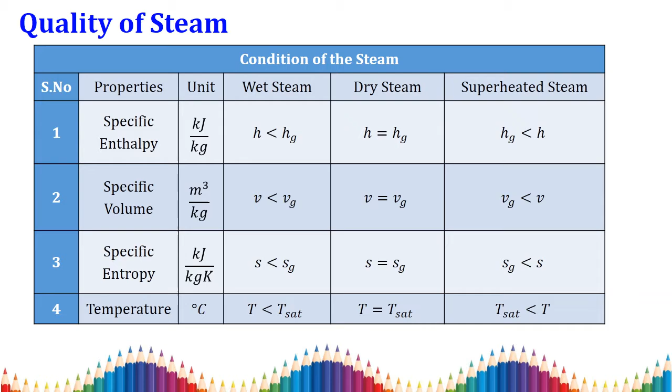Based on the qualities wet steam, dry steam, and superheated steam, we should know some basic properties and how to use the formulas for these properties. The first one is specific enthalpy, with unit kilojoule per kilogram.

If the steam is wet, that is, the given specific enthalpy is lesser than the saturated specific enthalpy, then H equals HF plus X into HFG, where HF is the specific enthalpy at liquid stage. This gives the combination of both liquid and gaseous vapor, and X is the dryness fraction.

What is meant by dryness fraction? It is the mass of vapor present in the total amount of the steam, that is, mg divided by mf plus mg. So X equals mg by mf plus mg.

For dry steam, as I already told, X equals 1. Substituting X equal to 1, the term HFG can be written as Hg minus HF. So HF plus and minus HF get cancelled, and the term becomes H equals Hg.

For superheated steam, H equals Hg plus Cp, the constant pressure specific heat, into the difference between the superheated temperature and the saturation temperature.

For specific volume, again for wet condition, V equals Vf plus X into Vfg; for dry steam, V equals Vg; and for superheated steam, V equals Vg into T superheated by T saturation. Also for specific entropy, S equals Sf plus X into Sfg for wet, S equals Sg for dry, and for superheated, S equals Sg plus Cp log of the ratio of superheated temperature divided by saturation temperature.

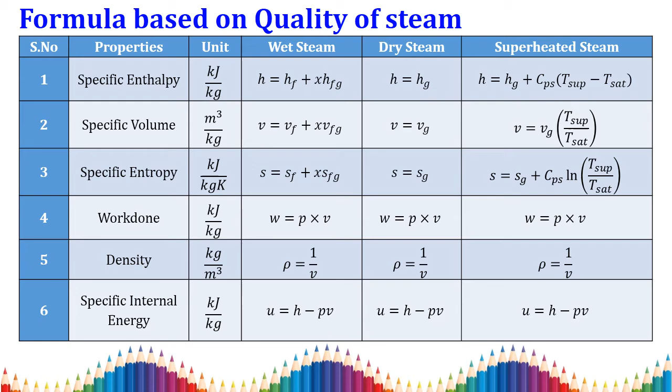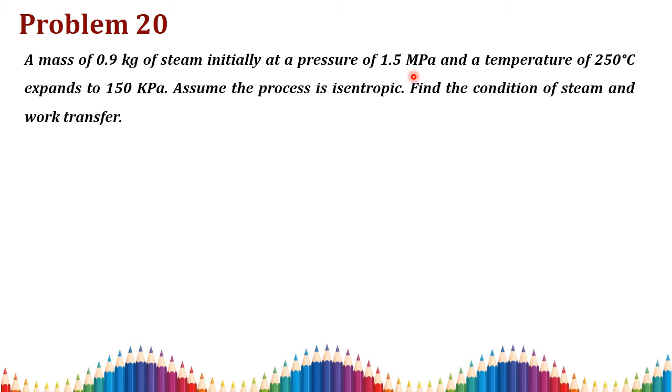Problem 20. A mass of 0.9 kg of steam initially at a pressure of 1.5 megapascal and at a temperature of 250 degrees Celsius. Here the mass of the steam is given, that is M is equal to 0.9 kg. The initial pressure P1 is equal to 15 bar and the temperature T1 is equal to 250 degrees Celsius, and it is expanded to a pressure of about P2 is equal to 1.5 bar.

Assume the process to be isentropic. If we say it is isentropic, the entropies are equal. So entropies are equal in this case. Most of the applications in thermodynamics are isentropic, for example a turbine is an isentropic process. Find out the condition of the steam and work transfer in this case.

So we need to find out the condition of the steam. We have to check the condition of the steam at both state 1 and state 2, and also we need to find out the work transfer for this isentropic process.

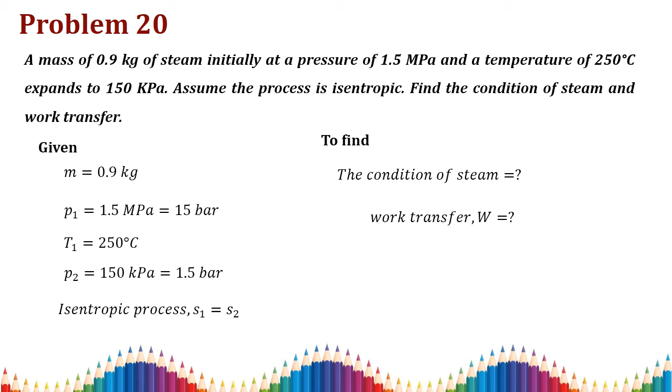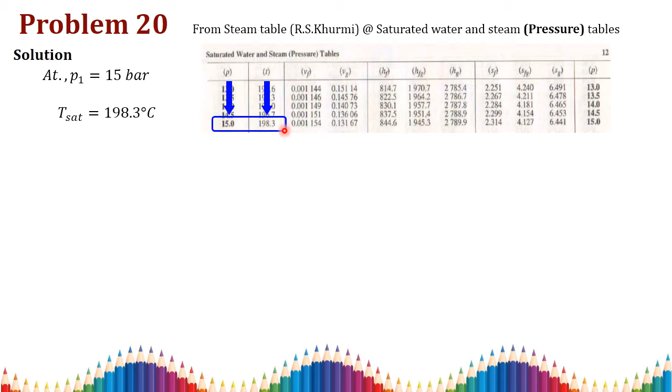So for that, at the saturated water and steam pressure table, at 15 bar pressure, we have to check the saturation temperature as 198.3 degrees Celsius. The given temperature is 250 degrees Celsius. So the initial condition of the steam is superheated because the saturation temperature is lesser than the given temperature. So the condition of the steam at state 1 is superheated.

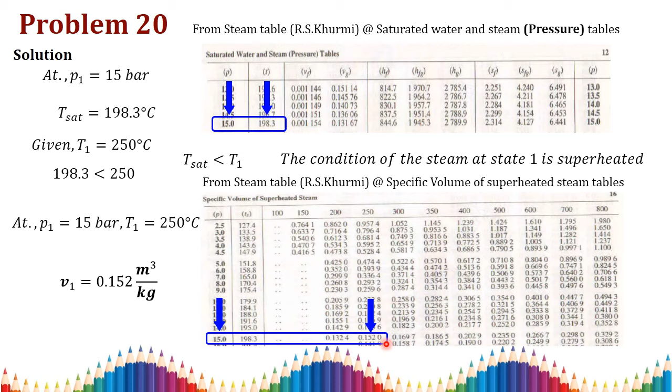Again, you go to the superheated steam table to take the entities of specific volume, specific enthalpy and specific entropy. So specific volume of the superheated steam table at pressure P1 is equal to 15 bar and temperature T1 is equal to 250 degrees Celsius. You can take the specific volume V1 as 0.152 meter cube per kg.

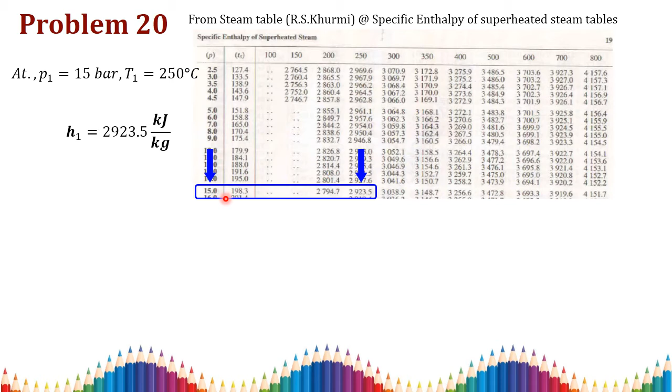In the similar way, you can take the specific enthalpy from the superheated steam table at pressure P1 equal to 15 bar and temperature T1 equal to 250 degrees Celsius. You can take the specific enthalpy H1 equal to 2923.5 kilojoule per kilogram. And also we can take out the specific entropy from the superheated steam table at the same pressure and temperature. You can take S1 as 6.710 kilojoule per kilogram Kelvin.

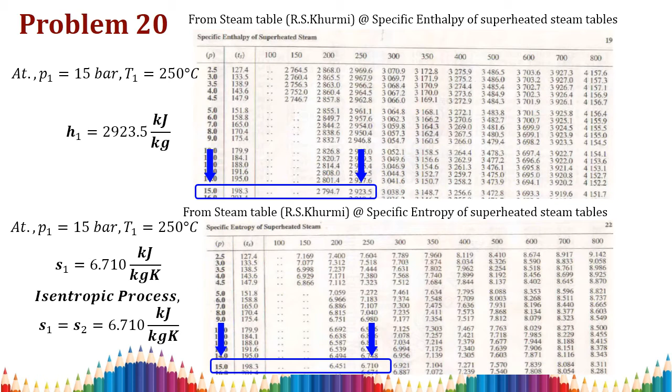Since we know this problem is isentropic, we can say S1 is equal to S2, which is 6.710 kilojoule per kilogram Kelvin. As we know, at the second state the pressure is given, so we need to find out the condition of the steam. For that you have to check out the values from the entropy table.

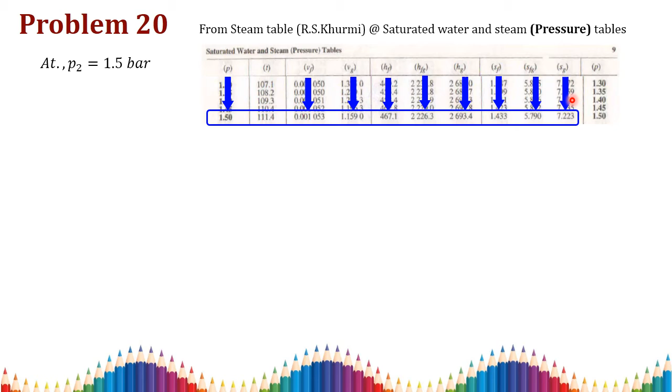At the constant pressure table P2 equal to 1.5 bar, you have to take the Sg value because the comparing value will be Sg, since it is an isentropic process, so S1 is equal to S2. Sg2 will be 7.223 kilojoule per kilogram Kelvin. As we know from the previous slide, S1 is equal to S2 is equal to 6.710 kilojoule per kilogram Kelvin, which is lesser than the saturated vapor value, so S2 is less than Sg2. The condition of the steam at state 2 is wet.

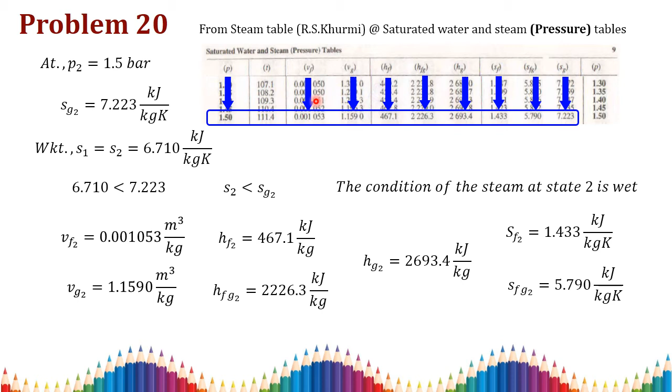So if it is wet, we need to find out the dryness fraction X. For that we need the data, that is SF2 and SFG2, and also I am taking all the values VF2, VG2, HF, HFG and HG, SF and SFG2. To find out work done also we need all the values, so I have taken all the values here from the steam table. So you write S2 is equal to SF2 plus X2 into SFG2.

Since the second condition the steam is wet, so you find out X2 and also you find out H2. H2 is equal to HF2 plus X2 into HFG2. Substitute all the values and get X2 value here, that is 0.911. So substitute those values to get H2 is equal to 2495.25 kilojoule per kilogram.

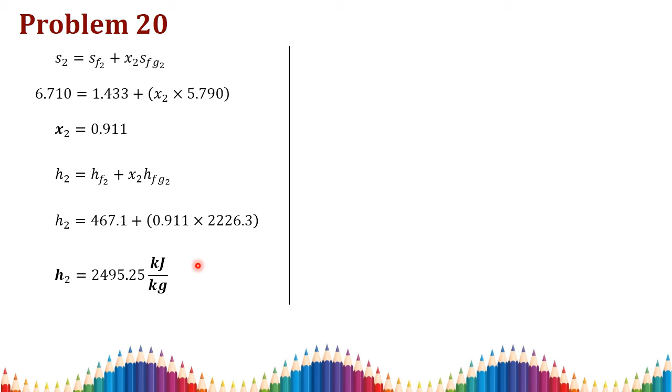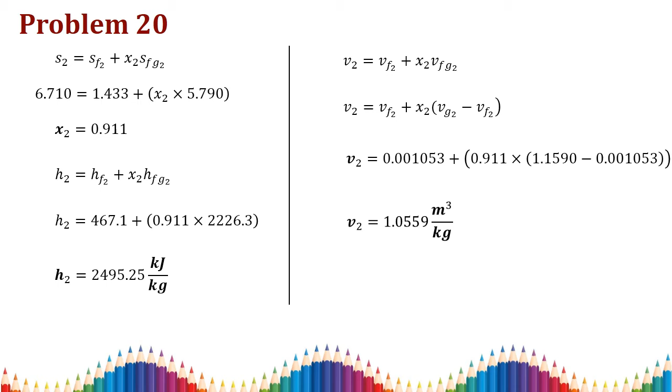And also the specific volume V2 is VF2 plus X2 into VFG2, that is V2 equal to VF2 plus X2 into VG2 minus VF2. So substitute all those values to get the entities, and substitute in the simple relation to get the specific volume V2, which is equal to 1.0559 meter cube per kilogram.

So we need to find work done in this case. Since Q is equal to work done plus delta U from the first law of thermodynamics, and as we know, since it is an isentropic process, there is no area under the temperature entropy curve, so heat transfer is 0 in this case. So Q is equal to W plus delta U, we can write. So W is equal to minus delta U, so W is equal to minus of U2 minus U1, that is W is equal to U1 minus U2.

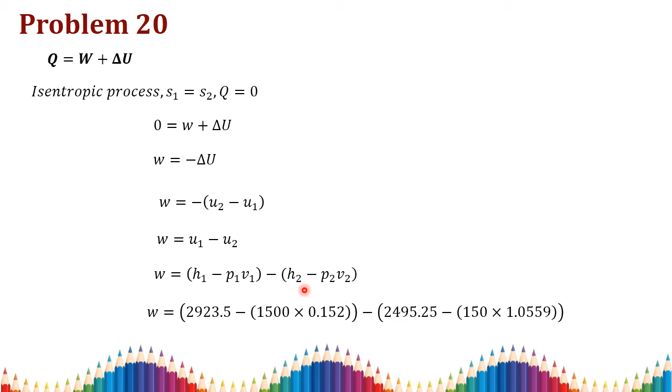So we know that H is equal to U plus PV, so from that relation we can derive U is equal to H minus PV. So I am substituting this. Work done is equal to H1 minus P1V1 minus H2 minus P2V2.

Substitute all those entities and your work done comes to 358.64 kilojoule per kilogram. This is your specific work done, that is work done per unit mass. But here the mass is given, so your total work done will be work done per unit mass multiplied by the mass.

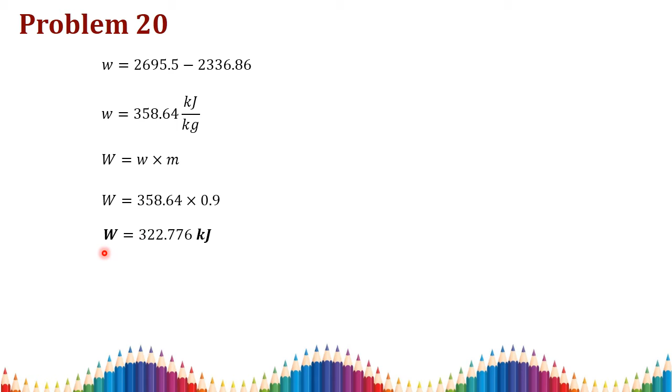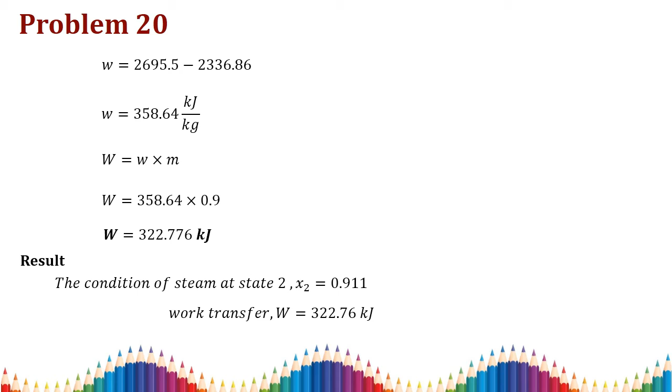You will get the net work done as 322.776 kilojoule. As a result, the condition of steam at state 2 is x2 equal to 0.911, so the condition of the steam is wet in this case. So work transfer W is equal to 322.76 kilojoule.

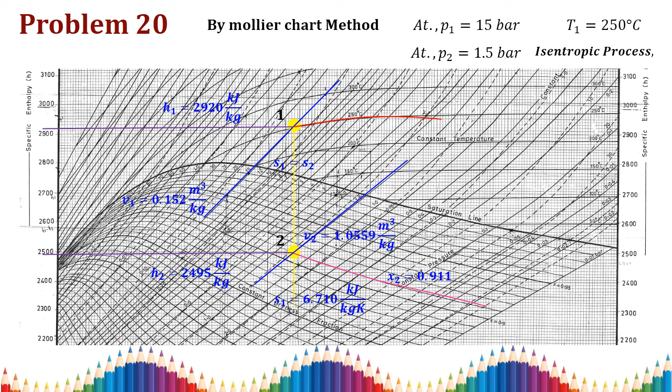So I have written all the values that I have taken from the Mollier chart, and again following the same procedure as in the steam table method. Since it is an isentropic process, heat transfer is 0 in this case, there is no area under the work done in a TS diagram, so Q is equal to 0. So work done is equal to minus delta U, that is minus U2 minus U1.

That can be expanded as H1 minus P1V1 minus H2 minus P2V2. Here you need to remember to substitute the pressure in terms of kilopascal. Work done will be 355.38 kilojoule per kilogram.

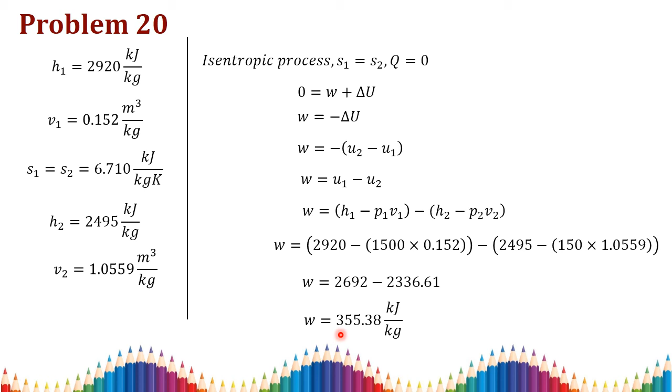This is work done per unit mass, but the mass is given in the problem, so you take work done equal to 355.38 kilojoule per kilogram multiplied by mass as 0.9, then work done will be 319.84 kilojoule. As a result, the condition of the steam at the initial stage is superheated and the final stage is wet, and work transfer is 319.84 kilojoule.